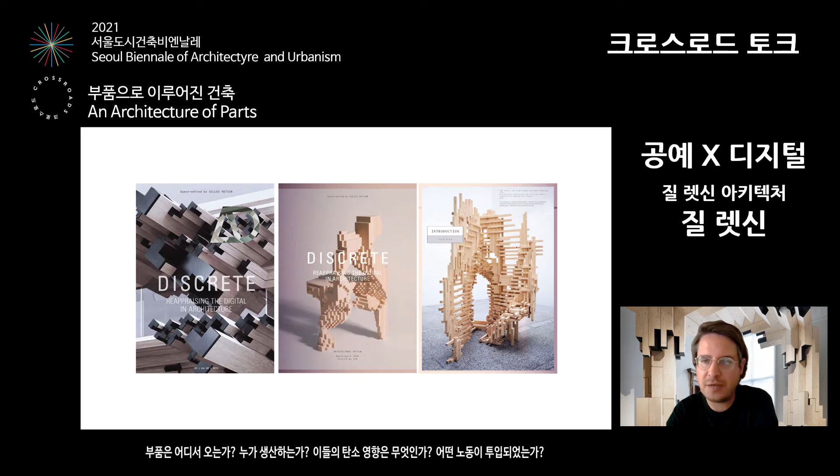Where do these parts come from? Who produces them? What is their carbon impact? What labor went into them? What is their life cycle? How do they come together? And how do they come apart again? It's a radical attempt to fundamentally question how we build today.

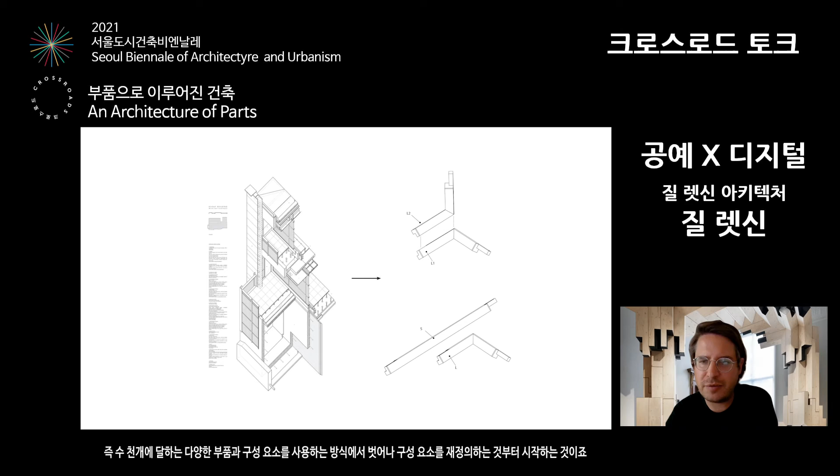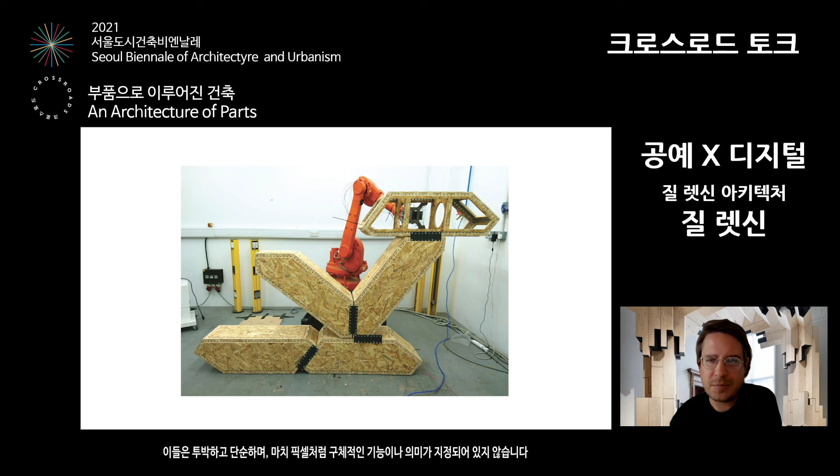My work seeks to start again by redefining the very materials and parts we build with. Rather than building with thousands of different parts and components that have become commonplace today, my work begins by redefining the very parts it consists of. These building blocks are thought through processes of extreme efficiency, logistics, and digital automation. They are blunt and simple, pixel-like blocks without a specific function and meaning.

While this is a process of logistics, automation, and efficiency, I understand architecture itself to play a crucial role here to generate beauty, meaning, and experience that transcends those parts. For example, this project in the forest in Belgium is made just from repeating elements, but its expression can never be limited just to the elements.

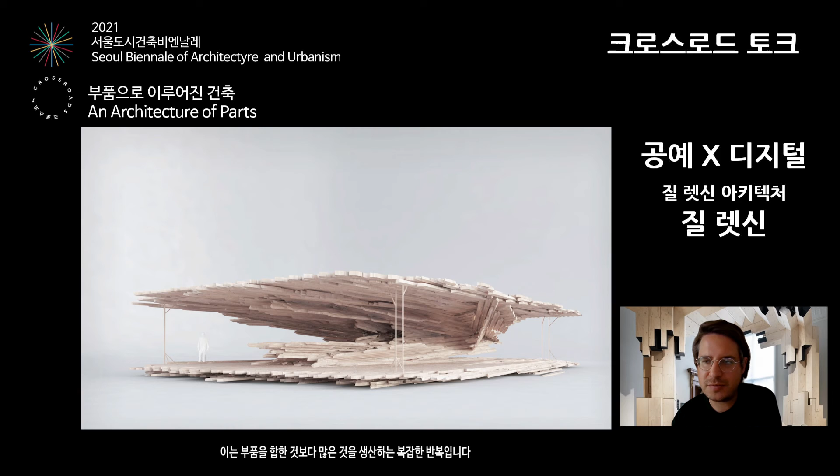This is therefore a new kind of assembly. There's no hierarchy, such as in classical part-to-whole relations or in historic buildings, but it also is very different from a modernist assembly, or what we would associate it today with modular architecture. It's a complex repetition which produces more than just the sum of the parts.

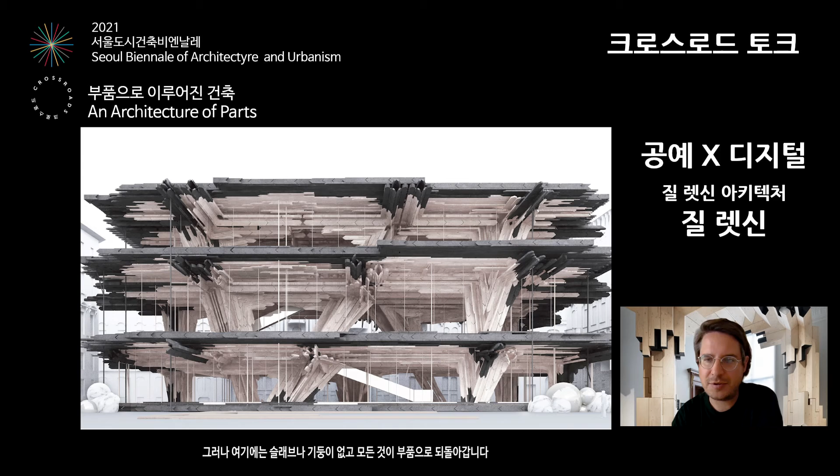This is another building based on the same parts we saw before, this time for a museum in Vienna. There's a kind of interrogation between the parts themselves and architectural elements, archetypes almost, we are all familiar with - the slab, the column, etc. Yet there are no actual slabs or columns. Everything can only be read through the parts themselves.

This is the same in this project, also in Belgium, that plays with these ideas. This is an assembly just of the same repeating parts, an L-shaped element and a straight one. These parts are composed of timber sheet materials and are hollow on the inside. It's vaguely familiar and very new at the same time.

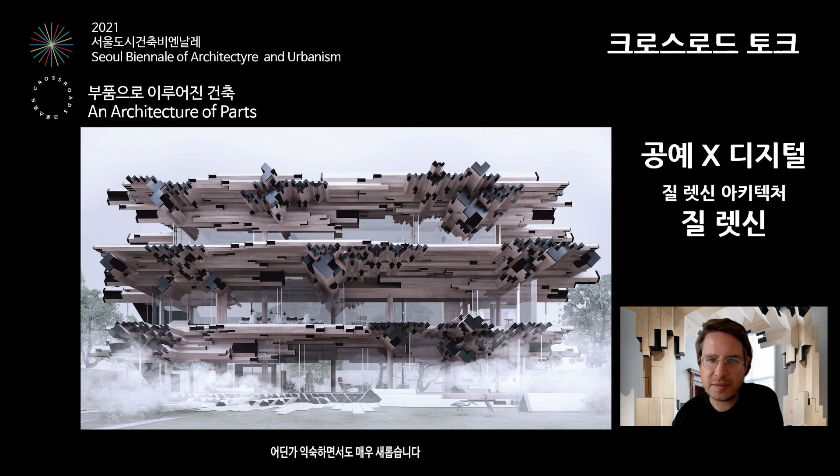The resulting architecture is strangely enough continuous, similar to a cave or a primitive hut, a continuous operation of the same material throughout, constructing everything. There is no such thing as floor plates, walls. There are no elements we're truly familiar with. The parts only obtain a function or meaning after their assembly.

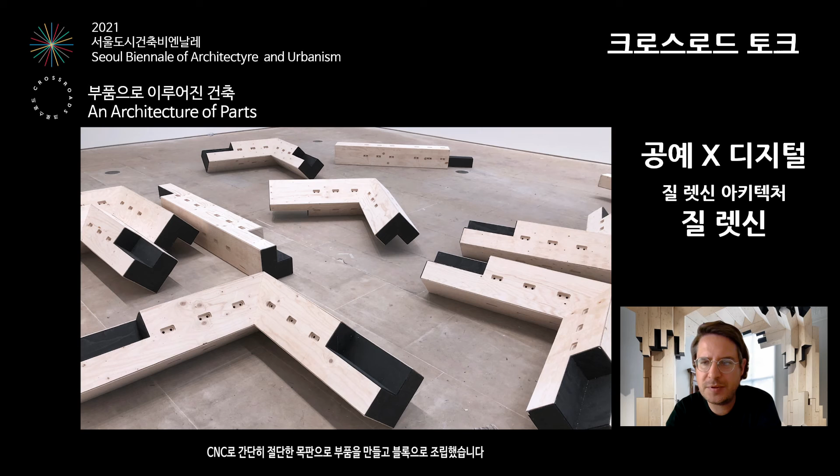I further explored this with this installation at the Royal Academy of Arts in London, which is a fragment of the house I showed before. We built these parts from simple standard timber sheets, which were CNC cut and then assembled into these blocks, which you can see here in one of the museum halls before they were assembled.

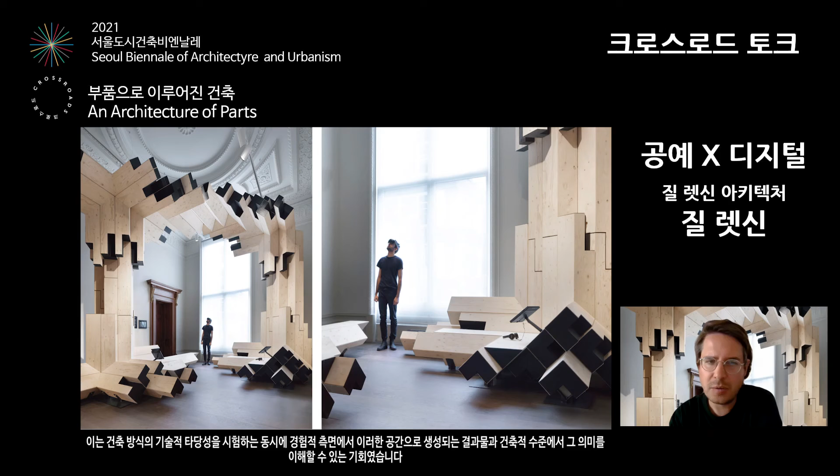While this was really an exercise in the technical feasibility of the construction method, it was also a chance to understand what these kinds of spaces produce in terms of experience, what it means on an architectural level. It's a strangely continuous space, organic, while at the same time clearly assembled.

The installation contrasts with the ceiling of the exhibition space, which produces ornament on a small scale with the plaster moldings. The installation, on the other hand, produces ornament and difference through the organization of the parts themselves. There is no cladding, nothing can be stripped away.

Just as how the first primitive dwellings were constructed from found materials, huts assembled from tree trunks or stones, this fully automated discrete architecture is also directly extracted from the forest. Its extremely short production chain strips architecture from its layers of history, right down to its raw and primordial monolithic state. We had a chance to apply this method for a small project in Belgium, a house extension which consists of a simple roof held up by 3 columns.

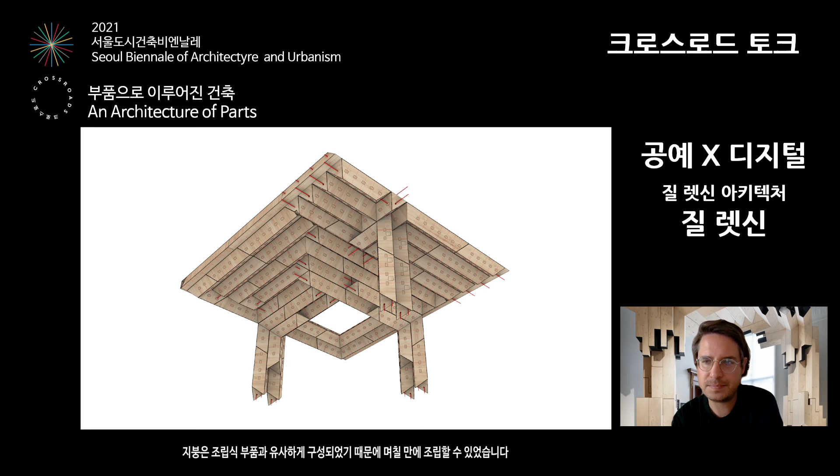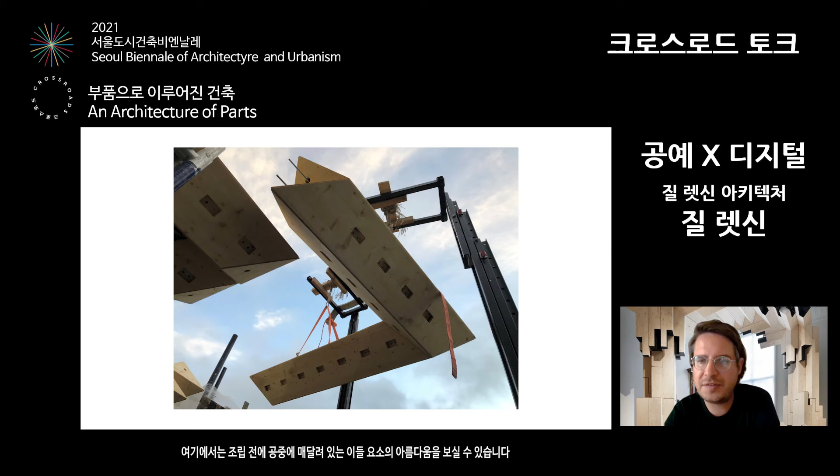The roof was constructed from similar prefabricated elements, which were assembled in just a few days. Here you see the beauty of these elements being lifted in the air before assembly, already kind of sculptural in their own right. These are some images then of the building site.

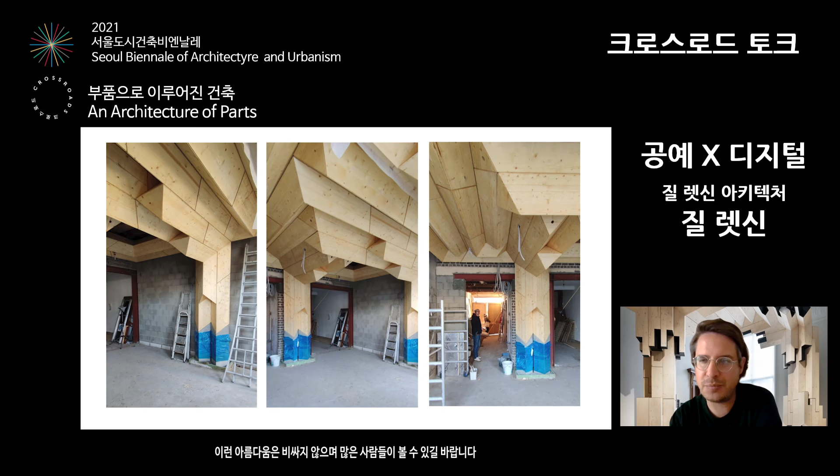For me, it's quite important to show that this kind of excessive beauty is actually affordable, that it could be used for such a small and humble project, not just for a large museum project. It's a kind of beauty that is not expensive and that wants to be distributed.

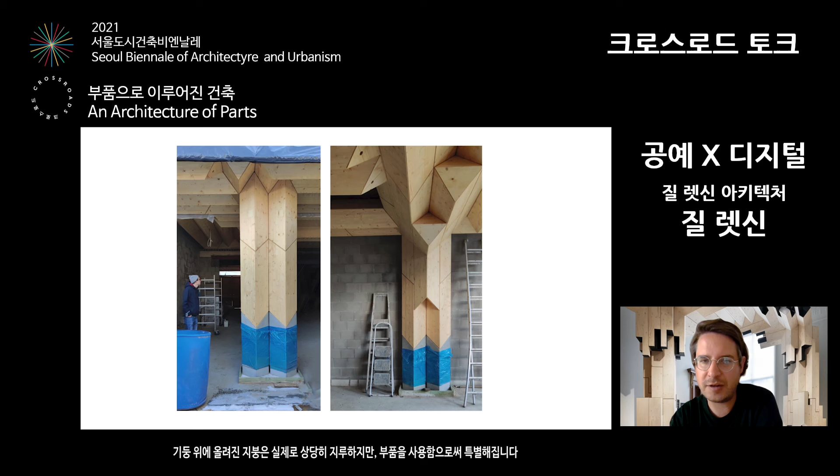At the same time, there is the contrast between the simple and familiar overall architecture, an actually quite boring roof with columns, which becomes extraordinary only through the parts it's built with. It's the contrast between the familiar, primordial idea of the roof with the column and the strangeness of the parts. It has something ancient about it and something novel at the same time.

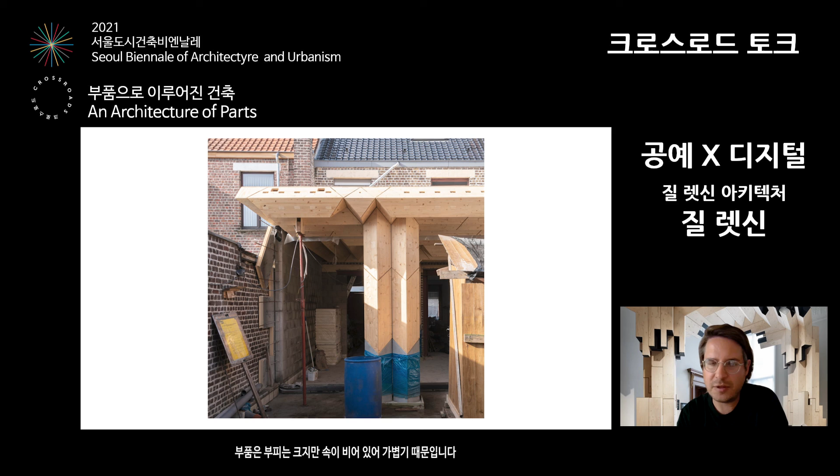It also has a similar contrast between weight and volume. While the parts are large volumes, they're ultimately hollow and lightweight.

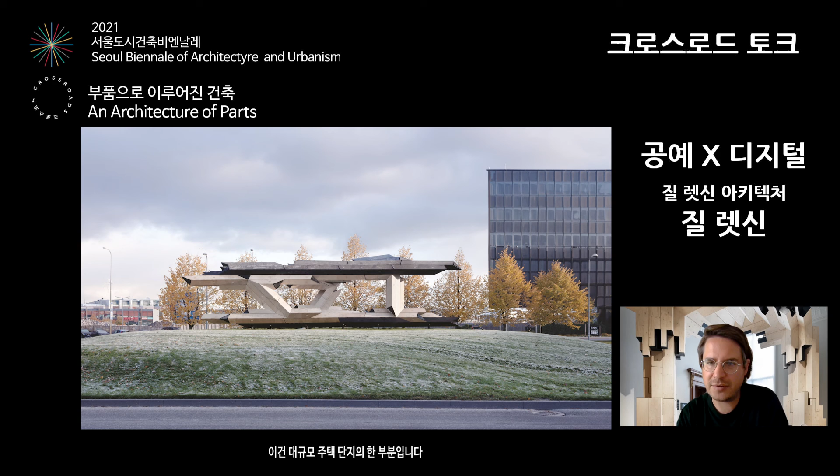This project continues an interest in housing, where these discrete automated systems potentially could have the most impact. This earlier project for an installation at the Tallinn Architecture Biennale in Estonia also demonstrates this as a fragment of a larger housing block. That housing block could perhaps be something like this.

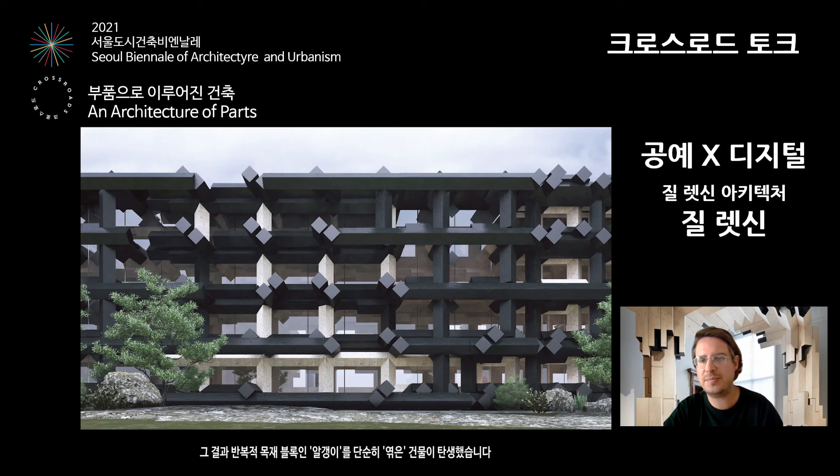This is a project for a 200-meter long housing scheme in London. It consists only of repeating timber building blocks, which can be assembled in a different position in every instance. This results in a building that is merely compiled from repeating timber elements, a building as a granulate.

Every instance of the building can be different, while this difference doesn't come at an extra cost. Nothing needs to be customized or crafted. It's merely an informational instruction to deposit an element in another position. The building therefore becomes granular and can be designed down to the grain.

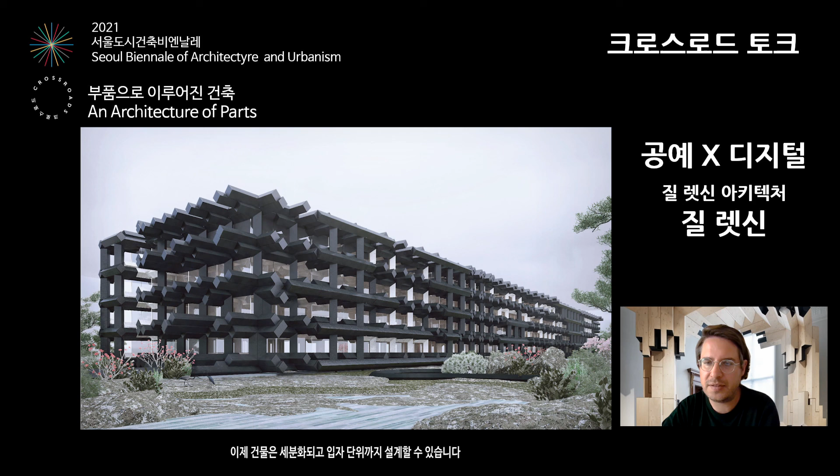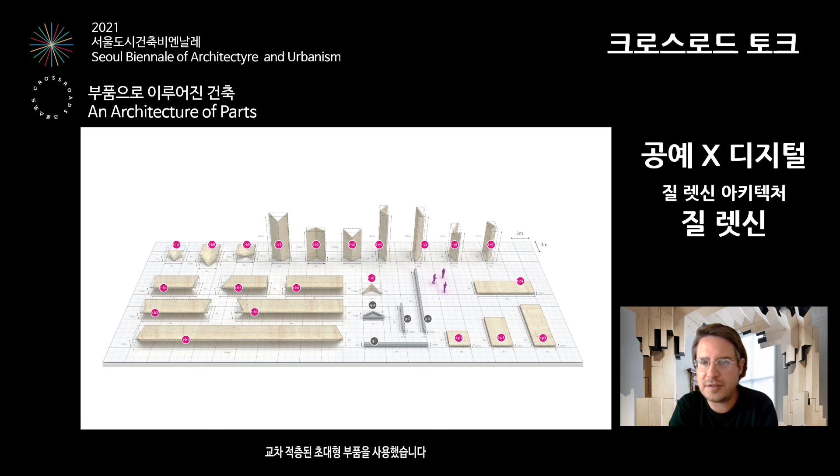My interest is in applying this on a larger scale, beyond small installations and house projects. What you see here is a project for a concert hall in Nuremberg, together with German architect Stephan Markus Albrecht. The parts are extremely large, cross-laminated timber elements.

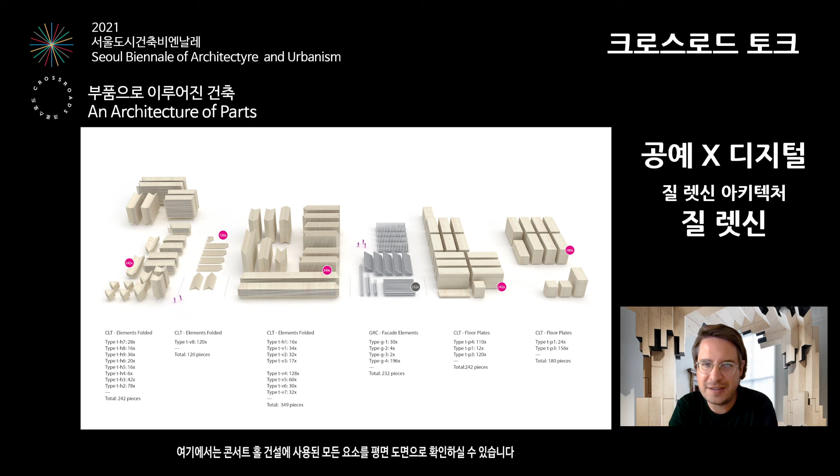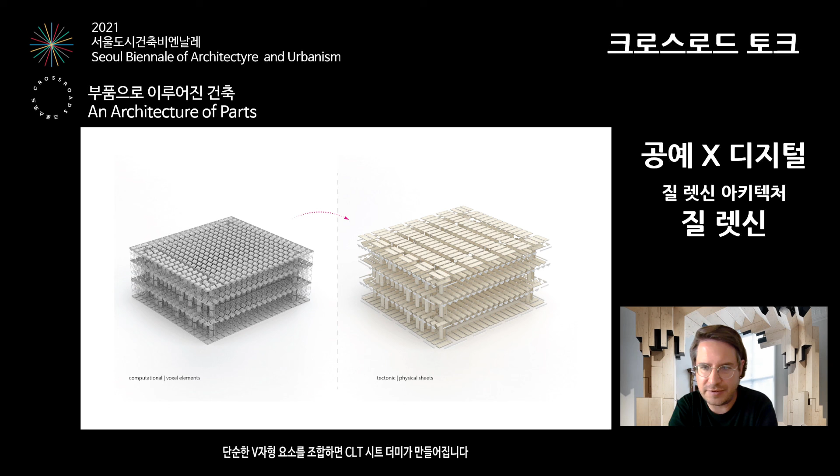Here you see all the elements needed to build the concert hall laid out flat. This is an entire concert hall broken down into its parts. This is the algorithmic logic behind the assembly: a simple V-shaped element that is aggregated together and then translated into a pure stack of CLT sheets.

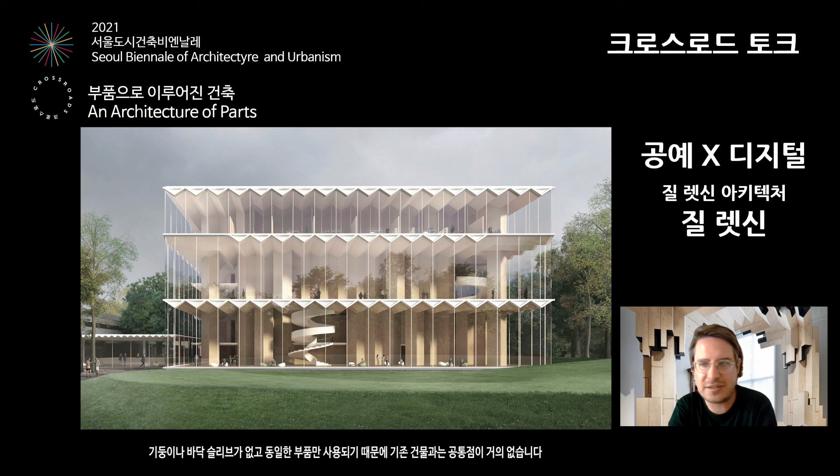The resulting building seems like a box, but it is not a box. It's merely an assembly of the same repeating parts over and over again. It has almost nothing in common with any existing building. There are actually no columns or floor slabs as such, just the repeating parts.

And as in the previous work, while it is all based on rectilinear elements, it is strangely organic and continuous. It's the same operation that defines everything around us.

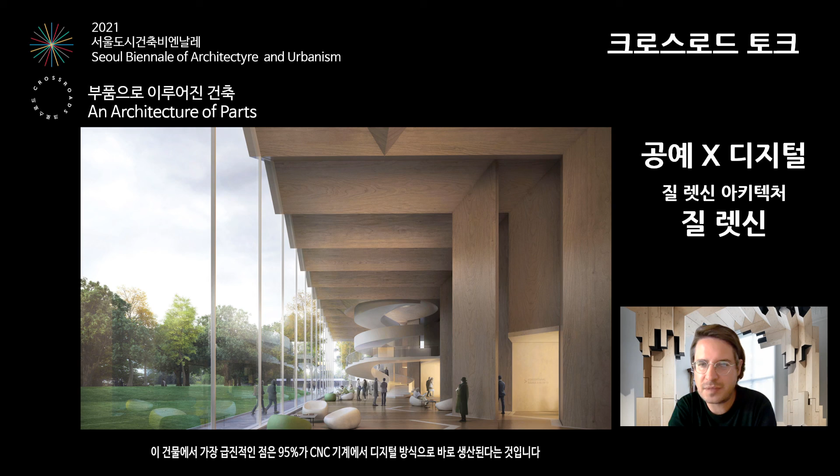What is most radical about this building is that 95% of it is digitally produced, straight out of the forest, cut by a CNC machine. Just the facade, the last few centimeters of the building's perimeter, is done according to the rules of existing building practices.

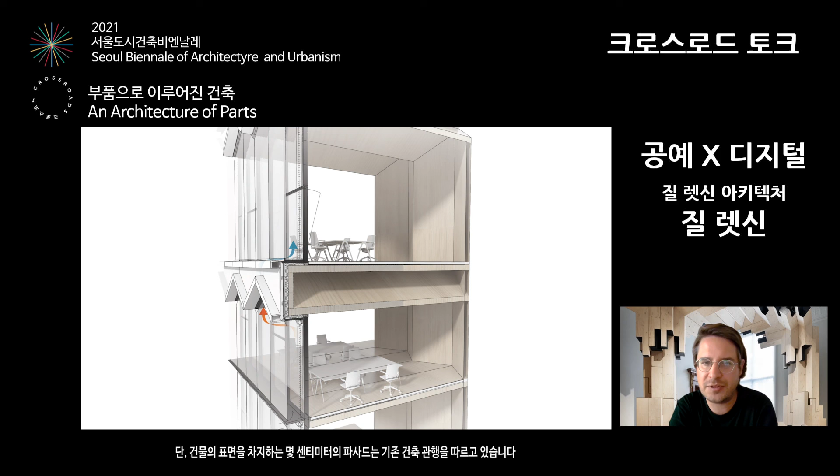I applied the same method to this other competition entry for the National Museum of Finland in Helsinki. The simple A-frame-like element, again cut from cross-laminated timber.

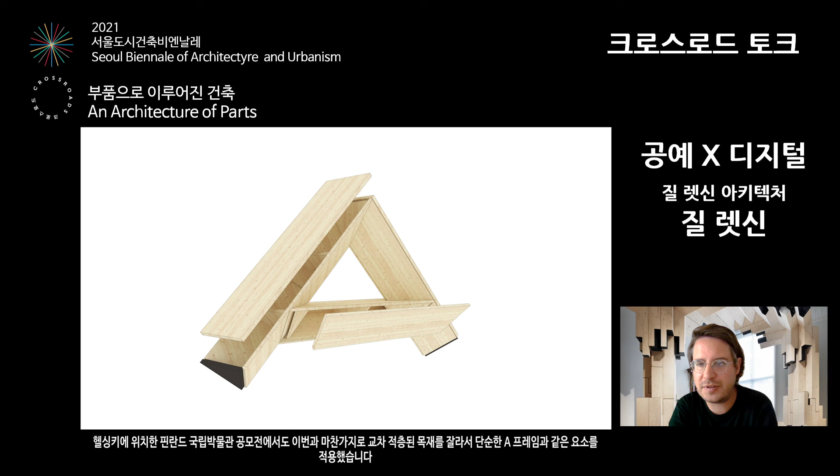That element then defines a primitive barn, a long black roof. At the same time, this roof has nothing in common with a traditional roof. It is actually fundamentally different.

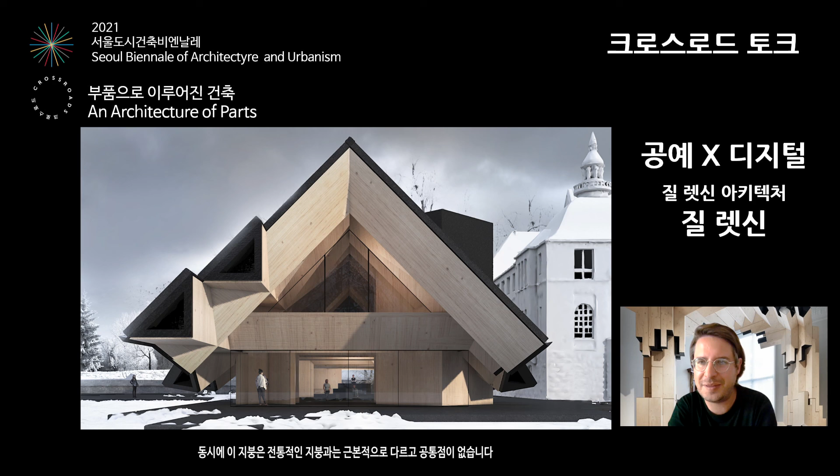While timber is an increasingly popular construction material in Europe and North America, the much more challenging climate of East Asia, combined with fast urbanization, has resulted in a slower adoption. Therefore, for the Biennale, I wanted to work around timber manufacturing and housing.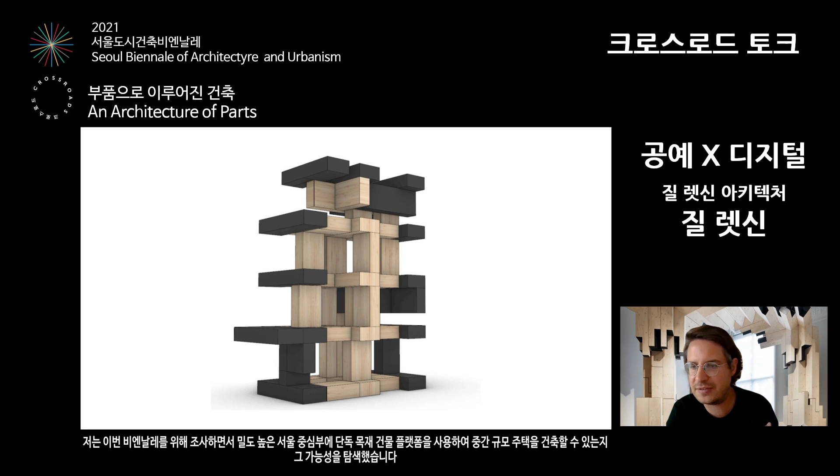My research for the Biennale explores the possibility for a discrete timber building platform for medium-scale housing on challenging, dense inner-city plots in Seoul. In close collaboration with local timber manufacturers, the research develops a prototypical platform for the production of discrete timber housing. This research is then tested on two 1:5 models of the full house, using the same construction techniques as the 1:1 scale would employ.

The model is based on the simplest possible building block. These blocks are strung together with steel cables kept under tension. This results in a kind of primordial assembly between a model, a toy, and a building. I like the extreme bluntness in this model. It looks almost banal, yet nothing about it is normal.

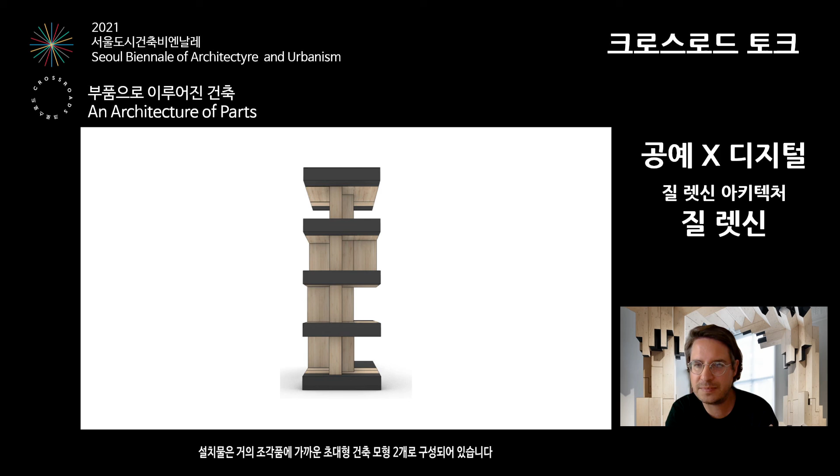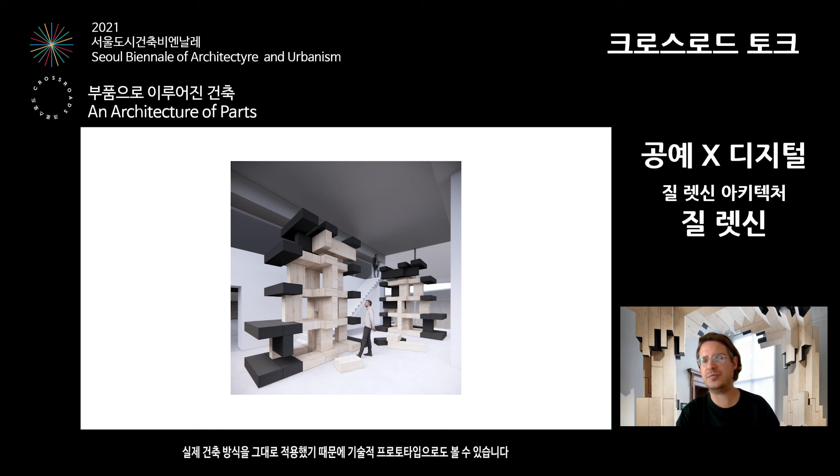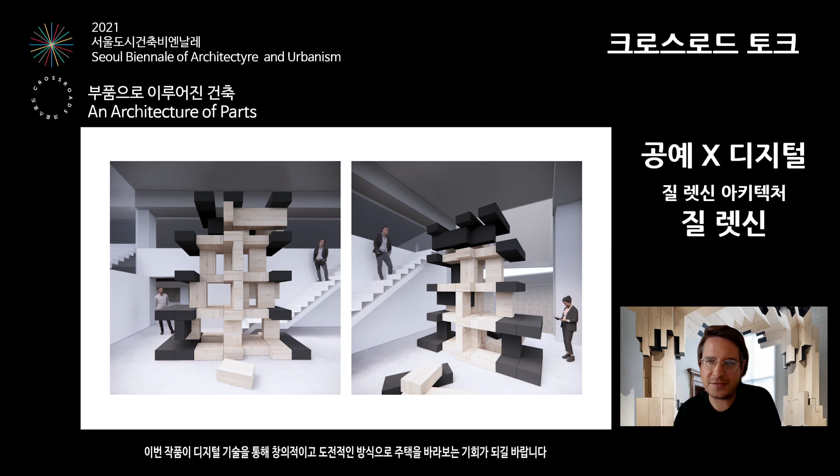The installation then consists of two of these extremely large architectural, almost sculptural models. At the same time, there are also technical prototypes, as the way that these will be built in reality would be exactly the same. The installation ultimately aims to demonstrate how digital technologies allow us to again think creatively and provocatively about housing. So I'll leave you with this. Thank you so much.